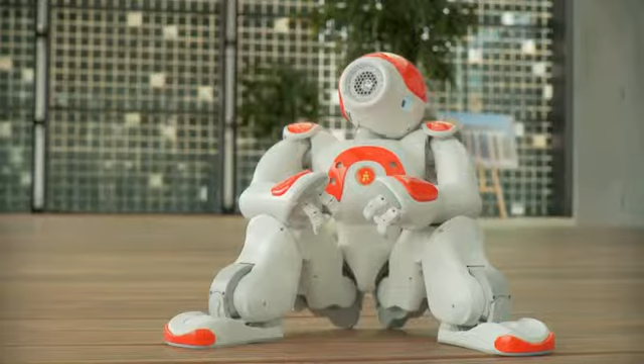I want to come with you.

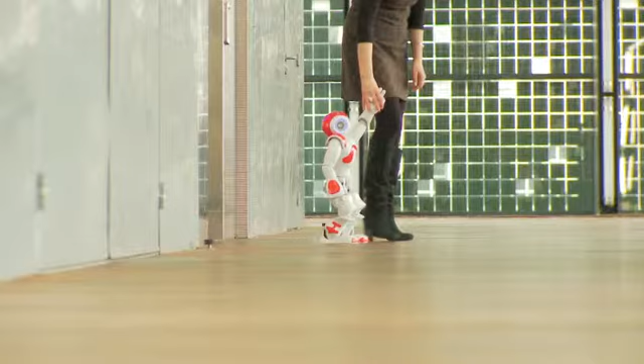Our goal with robots is to have robots helping people, and not only the geek. I want to have robots helping everyone. But in order to do that, we need to have the robot accepted by people.

I'm Bruno Maisonnier, head of Aldebaran Robotics, founder and CEO of the company.

Give me something, please. Thank you.

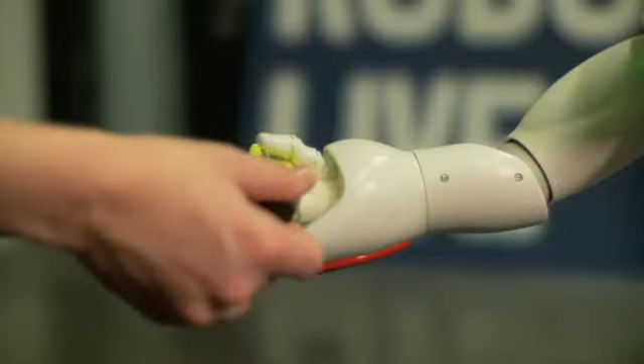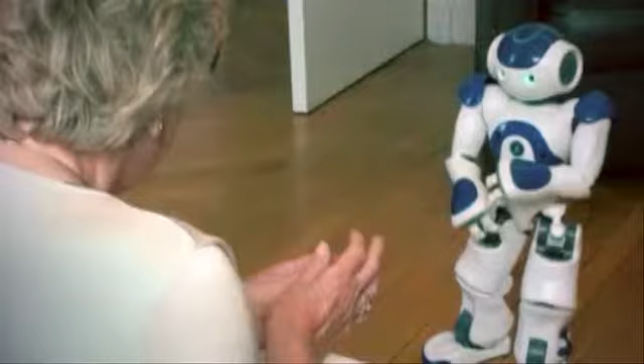We think that the robotic market is going to be huge in the future. And this comes from the simple fact that the world population is aging very fast. And we need robots to do whatever they need at home.

What do you want me to do?

When people are depending on someone else and need to have someone else helping them, they are in a secondary position. But when they have a robot doing that, they are in the first position. They are leading.

Notre Dame University, United States, they are really working with robots helping autistic kids. We discovered that robots are objects they can interact with, they are comfortable with interacting with robots, they like it.

The first impression that you get when you see the robots is the outside shapes. If the shape, if the form is too aggressive, you won't interact with that robot.

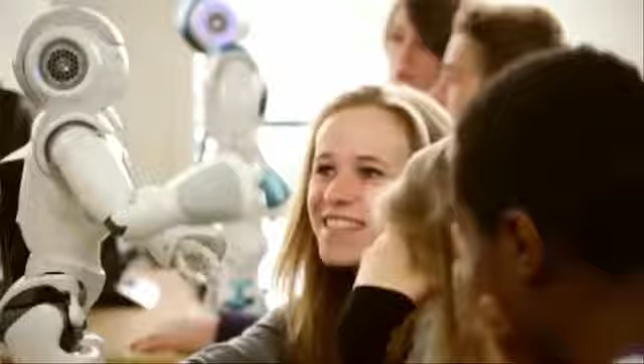There are many people ready to develop softwares, but we are just lacking robots. We are just missing robots. So that's why Aldebaran began with a platform for providing all those who want to explore this new world, who want to be part of this revolution, to be able to do it.

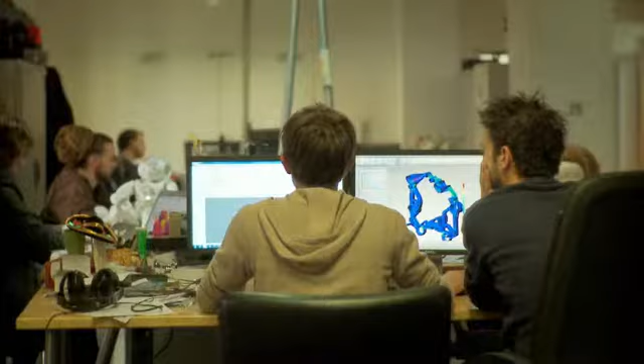I've been working for Aldebaran Robotics for 5 years as a mechanical engineer. I especially work on designing gears and integrating motors into the platforms we develop at Aldebaran.

Well, like Ludovic, I am also a mechanical engineer. I mainly work on the shells, but also on internal parts and the structure.

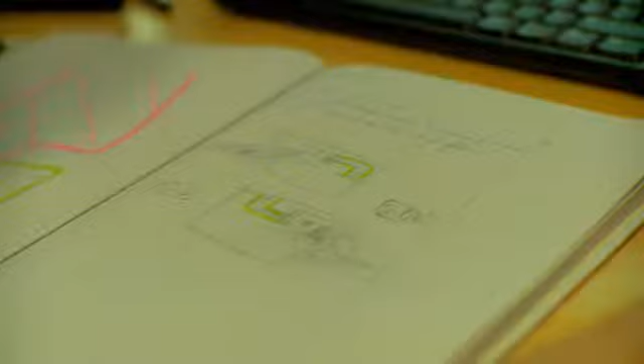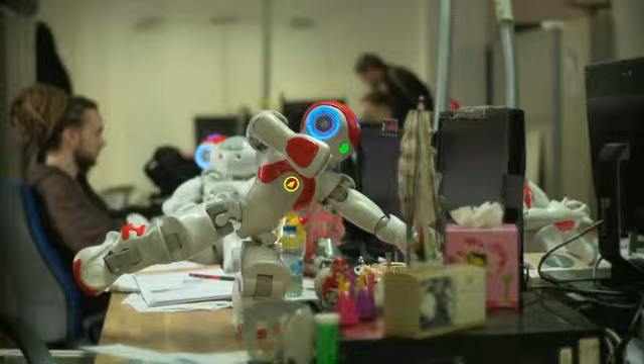For each project, the process is similar. We start with sketches, essentially 2D images, that we then translate into digital data and 3D volumes using SolidWorks surfacing tools. This gives us the ability to rotate the pieces and robots in the space and to improve the design when it's not as pure as we want it to be.

So we start with the exterior design of the hand as we have here. It is smaller than a human hand. It's the size of a small child's hand. And inside there are over 100 parts just for one hand.

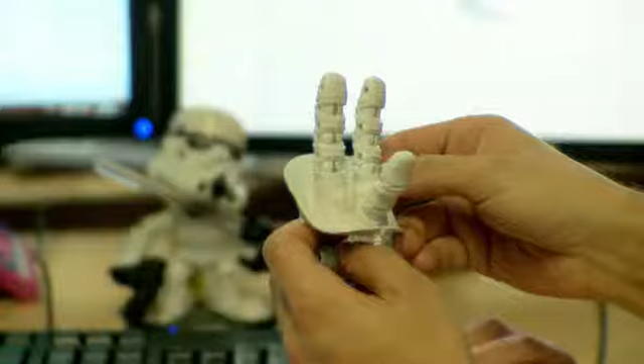In addition to all mechanical constraints, we have 2 degrees of freedom that we have implemented in this hand, and SolidWorks allows us to look at all the possibilities and optimize the mechanical design inside the hand.

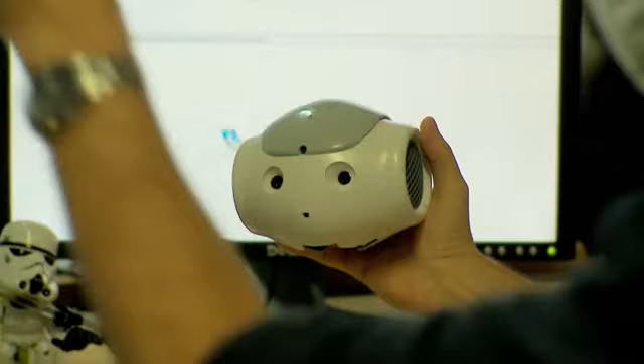Even more complex is the robot's head, which combines mechanical, electronic, and optical components, like cameras, for example. One might say that all NAO's intelligence is gathered in its head. There are also LEDs, microphones, and speakers.

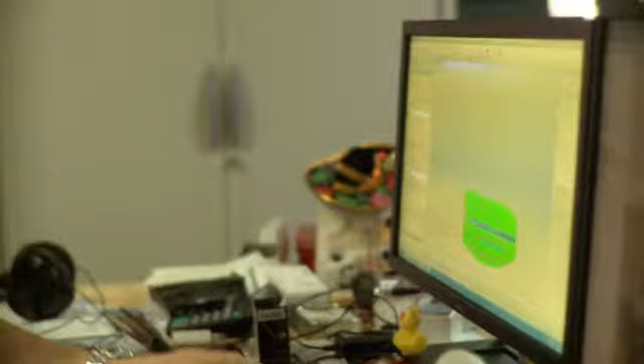We use SolidWorks simulation, which allows us to generate digital models and know if the part will resist to shocks or not, based on stresses we apply to it. And once we have proceeded with validation in SolidWorks, we can move on to production.

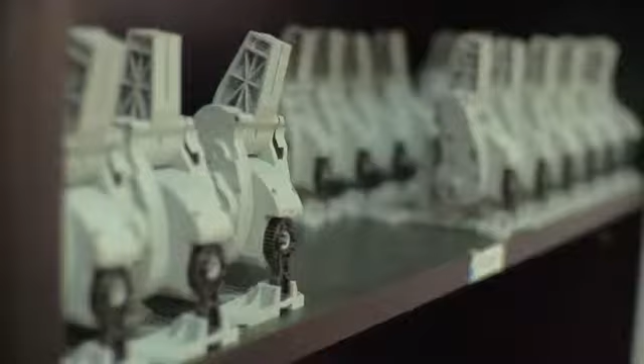We use SolidWorks in order to project the product into the future, and we can really optimize, really improve the parts before it exists, before it is manufactured. You have to know that into that robot there are more than 1,200 plastic parts.

On my team there are 45 people working on the design, and I need to orchestrate the daily work and make sure that when we create new parts, the version is correct. So for that we use EPDM, and it helps us to focus on innovation while EPDM is taking care of the structure of the project.

I hate the techno stress. I don't want to have devices that are asking me to invest intellectually to understand how they're working. So I don't want my robots to create techno-stress to people.

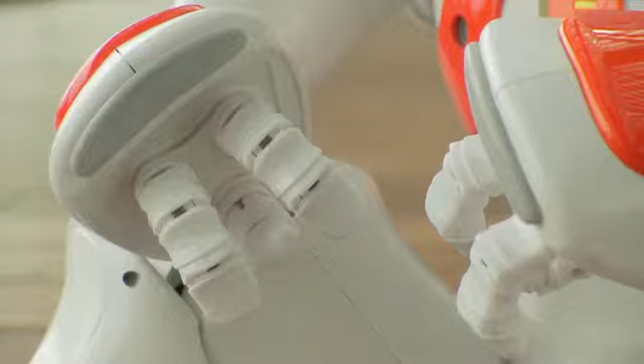When you want to change the world, to improve things, you have to go beyond what you are able to do. You have to decide to go for something you don't know how to do. It's a new territory to conquest.

Shall we try something new today?